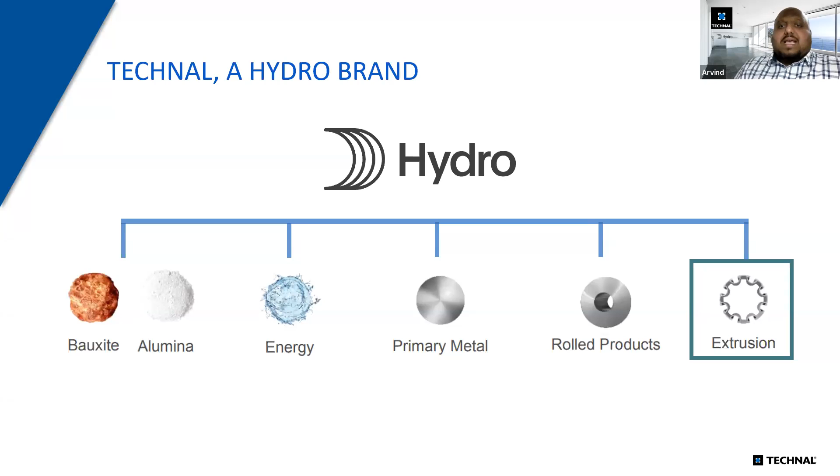So we have 5 business units, and as Technal, we come under the extrusion business unit. In the extrusion business unit, apart from having more than 100 locations of extrusion facilities globally, we also have precision tubing, which is indirect aluminum production used in radiators, refrigerators, industrial applications, and of course in building systems as well.

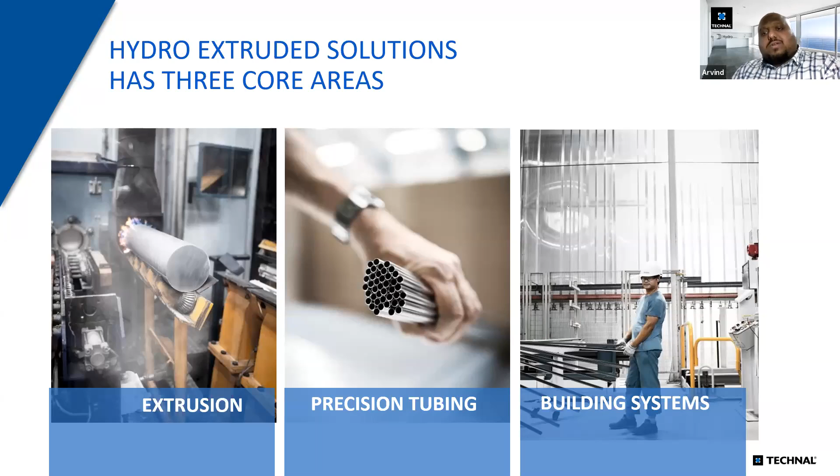So you would find Hydro products in brands like Tesla, in Coca-Cola cans. Our brands and products are used in a very wide range of multiple brands. Now, coming to the architectural business, the building systems, we have with us 4 brands under Hydro Building Systems. We have Wicona, a German brand with more than 70 years of experience. We have Technal, a French brand with more than 60 years of experience.

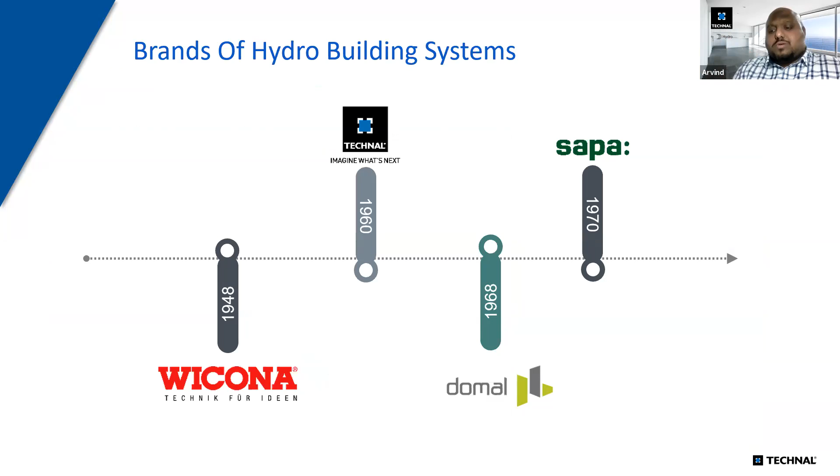Domal, an Italian brand, and Sapa, a Scandinavian brand. All of this put together, we have a wide variety of products and solutions which we offer for the windows, doors, and facade business.

The Technal brand is the most popular brand in the Middle East because it's been here for more than 40 years, with rich experience dealing with local conditions and environment. As a brand, Technal hails from France, from the southern city of Toulouse, which is also very famous for the Airbus, manufactured in the same place where Technal originates from.

Technal as a brand is in more than 70 countries, with 60 years of experience. Architects really like to work with Technal because we tend to work with them very closely in helping them design and achieve their design intent for their wonderful architectural pieces.

In terms of product solutions, we have sliding systems, windows, doors, facades, and we also have fire-rated windows, doors, and facade. We have bullet and burglar-resistant products, handrails, pergolas, and conservatories. You will start seeing these products in various formats along this week as we showcase different technologies and new trends.

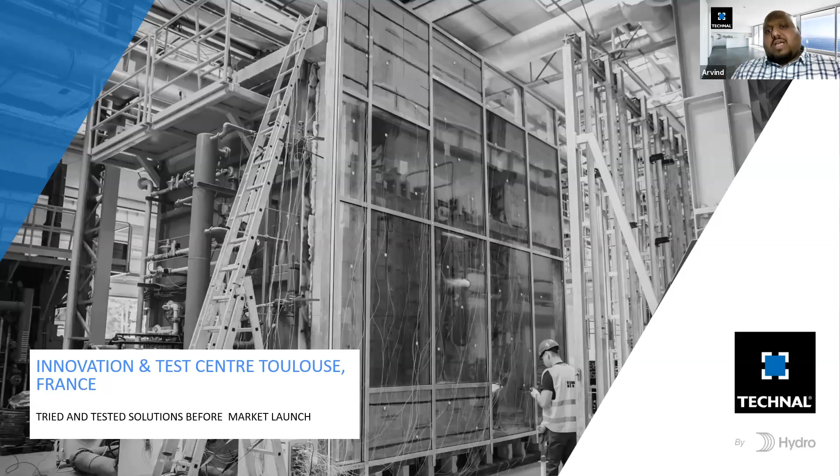What's very significant about Technal is that all our products are tried and tested at our Innovation and Test Center in Toulouse for 3 years. Even before a product comes to the market, we're doing a lot of testing and market prototyping before it's finally launched, which gives you peace of mind because all these products are tried and tested.

We also have in the lab a wonderful facility for acoustics, seismic studies, structural studies, and joinery enhancements. We also have a dedicated team studying net zero and doing research and development around net zero buildings. So if you, as an architect or designer, would like to explore further research and development, please feel free to talk to us.

We'd be more than happy to collaborate with you, encourage and work with you, and support you in your R&D for your projects. In a nutshell, Technal has been here for 40 years in the Middle East.

We serve over 10 countries, with more than 150 authorized installers across the GCC. We have accomplished more than 2,500 projects. We have a 95-member team in the Middle East, probably the largest for a building facade system company, and 3 warehouses with more than 60,000 square feet of space.

Our headquarters for the whole operation is in Bahrain, in Manama, and that's a nice photo of our office complex. We have a couple of warehouses in Bahrain, in Dubai, and in Oman as well.

You see some photos of our office and our showroom. If you ever pass by Bahrain or Dubai, please let us know — we would love to host you in our showroom. And that's our wonderful team here in Dubai, all looking forward and excited to welcome you whenever you pass by this side.

So what do we do in the region? Apart from Technal being a global leader and a local leader in profiles and accessories, we also do a lot of other stuff: training, testing, project services, software, consulting, optimization of products, testing, and certification. So we have a whole range of solutions which we offer to this region.

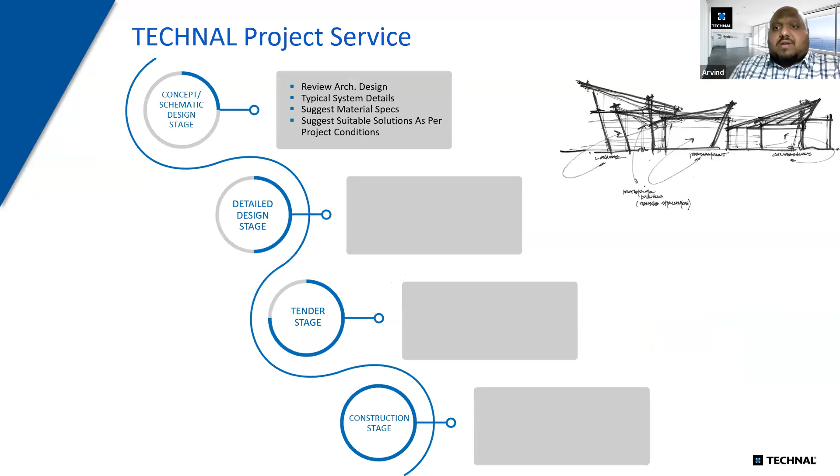In terms of project service, we work with architects right from the concept stage, supporting them in achieving their goals. As the project moves to the detailed design stage, we give further inputs and clearer details with interfaces so the architect can develop strong IFC drawings, so the contractor doesn't take things for granted and works with high quality solutions and good recommended finishes as per the design intent.

Once the project moves to the tender stage, this is where we have a term we keep hearing — value engineering. This is where we also work with the architects, helping them understand ways and methodologies to better the proposal and hopefully achieve the desired cost targets for the project.

Last but not least, once the project is under construction, we have a dedicated team of site engineers who visit you and help your resident engineers ensure that the products designed in the concept and detail stages are used completely in the right fashion at the particular project site.

And this is where we also help architects to ensure, and we ask them also to make sure that Technal reviews and stamps the shop drawings so there's no mistake and error which could happen at the project level.

So in terms of projects which Technal has done, we work across all kinds of verticals, all kinds of formats of projects, from education to villas to tourism-related hotel projects, health and well-being, offices and shop fronts, private and residential. So it may be a small project to a super tall, super structure, high-rise building. We work across all formats.

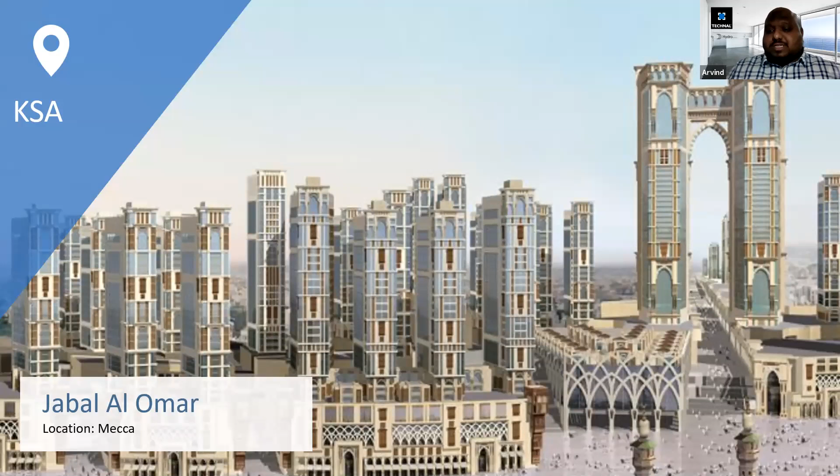Right, so that is a quick introduction of what Technal does and how Technal is positioned in the region. And now it gives me the opportunity to segue into the main topic which we have come here today for. So we want to talk about what are the key functional parameters which one should take into consideration while choosing the window, door, and facade.

Now, in the Middle East, we are known to adopt the latest technologies. A great example is mobile phones. Ever since the 80s, whatever mobile phone was launched, Middle Eastern people, including all the expats living here, were the first to upgrade to the technology. In fact, there was a report which says we have 99% social media penetration, meaning we have the latest devices with our phones. And as a new phone launches, I think the first market to adopt it is the Middle East.

But unfortunately, when it comes to specifications for facades, right from the 80s till now, we always follow the same principle: that the facade or aluminum window and door must have profiles with 3 mm wall thickness. And this has not changed ever since the 80s till now. Many of the projects, many of the consultants still believe that a thick profile or a thick frame means a strong frame. Hopefully the objective of today's session is to break this myth and give you better parameters to look forward to while choosing the facade, and not just the wall thickness.

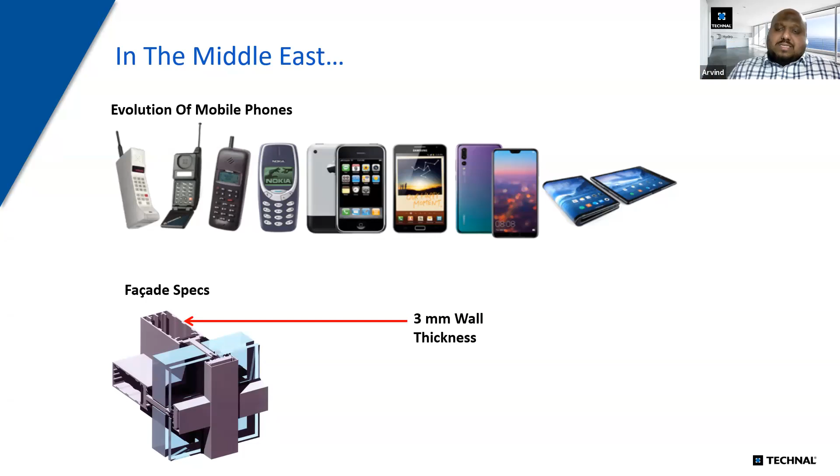So what does a facade skin do? What are the real objectives of the facade? First, of course, you want to design the facade in a way to reduce all the negative external factors. You have heat, noise, damp, storms, rain, cold, sun. So you have all these negative factors which you want to protect your facade from.

On the contrary, you also want to use the facade to maximize some of the energy available around you. You want to let in natural light inside your building as much as possible. You want to let in ventilation, and especially during this COVID pandemic time, it's proven that the more ventilation you have in your building, the more you're able to clean and cleanse the building with fresh air and negate all the unclean energy, unclean air you have thanks to air conditioning and so on. And we also want to use the facade positively with the sun that is available, in a very positive way.

Your facade is the first thing you see on a building. The first impression is the best impression, so whatever your facade is designed, this is the first thing people see. You always want to create a striking impression from the first view of the building itself, which is why the facade skin is quite important.

So what are the real parameters you should look for? I've shortlisted 10 of the most important critical factors we look forward to.

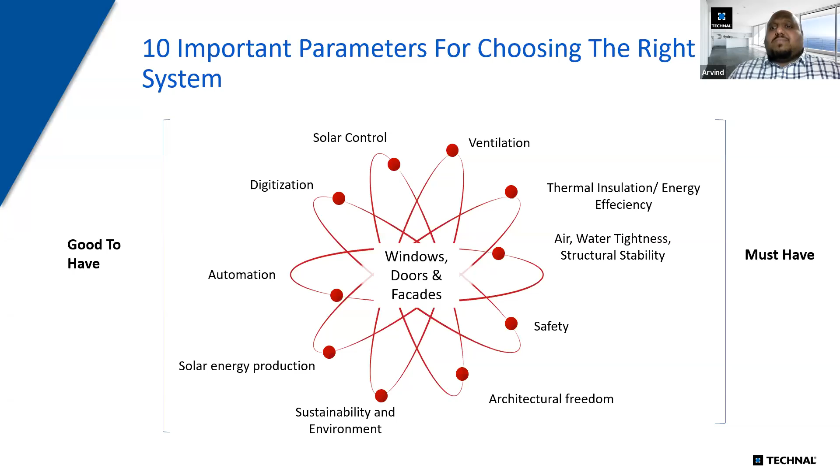So you have 10 interesting parameters as a base consideration for choosing the right facade system. I've classified the ones on the left as good to have - good technologies worth considering. But on the right, factors like ventilation, thermal insulation, air tightness, water tightness, structural stability, safety, and architectural freedom are must-have and non-compromisable. These are parameters you should always consider while choosing your facade system.

In the Middle Eastern context, the most important baseline parameters we should consider are wind loads, water tightness, air permeability, thermal insulation, acoustic insulation, and fire and life safety. I'm happy to say the new Saudi Building Codes of 2018 are fantastic, as they've given very detailed and broad guidance on some of these topics, which I'll showcase throughout my presentation along with its relevance to the new Saudi Building Code.

So today, as architects and designers, not only do you have these important factors, but you also have baseline government guidance that helps ensure your specifications are broader and tighter in the context of the performance of the facade skin.

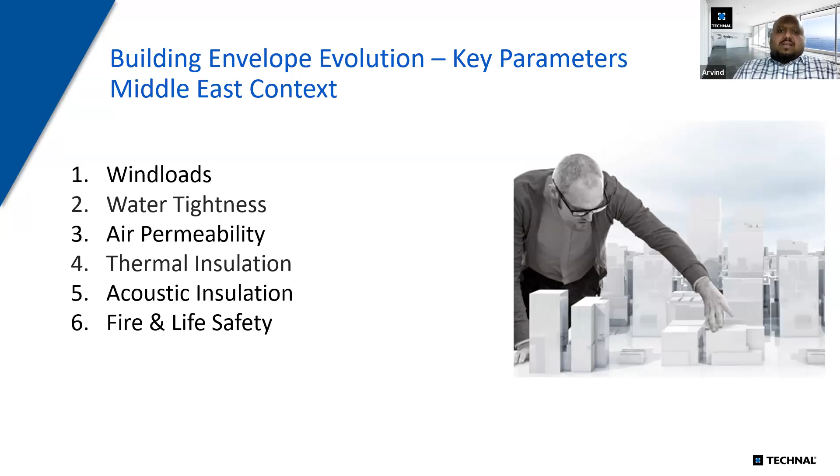Let's talk about wind loads. The wind loads essentially relate to the structural integrity of the whole facade, window and door. The facade and fenestration product you choose must be considered for the wind loads the building will experience in that particular area. Just having a wall thickness of 3mm does not mean it's suitable to adapt to winds or the different wind factors that impact your building.

So how do you address that? There are some considerations we make. Firstly, when a building is designed, it has what we call a wind tunnel report, which gives a facade cladding pressure study indicating the kind of wind pressure the building is exposed to. This also factors in the buildings around it - a building surrounded by high-rise buildings could experience very different wind pressure due to vortex effects if located in such an area.

Local building codes also help determine what wind pressure should be considered for a particular building. In the Middle East, we usually use the American code, ASCE 07, as a guideline in the absence of such wind tunnel studies and cladding pressure data.

Now I'm showing you a nice, interesting video. In 2019, there was a small, low-rise building in Odisha, in the eastern cities of India, and we experienced a cyclone called Cyclone Fani. So watch how this cyclone passing through the building really impacts the whole facade and the windows and doors in this particular building.

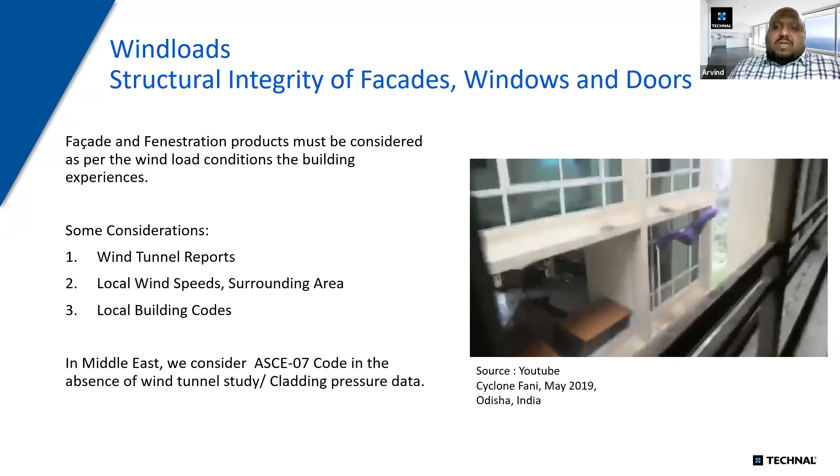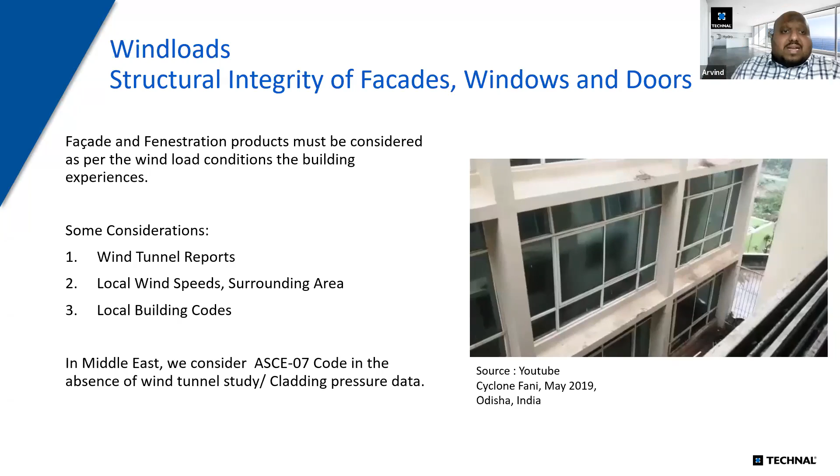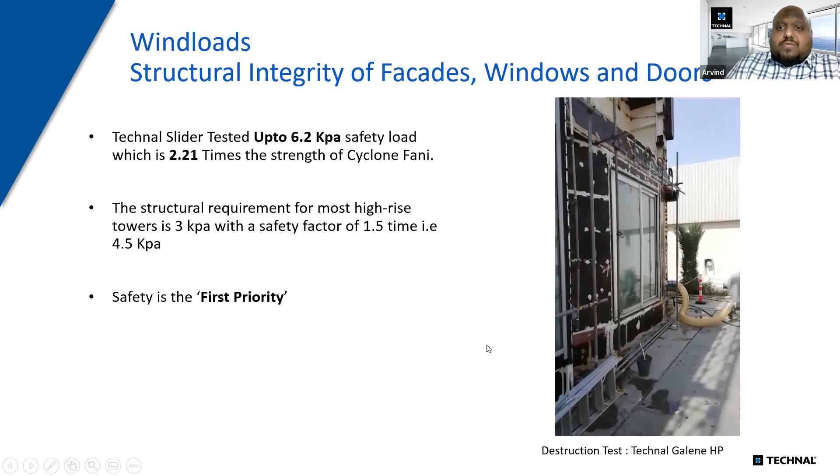So how do we design products to tackle such wind pressure? At Technal, we test our doors, windows, and facades for what is called destruction wind pressure. Here, for example, this sliding door is being tested for a destruction wind pressure of 6.2 kPa, which is 2.21 times the strength of Cyclone Fani which you just witnessed.

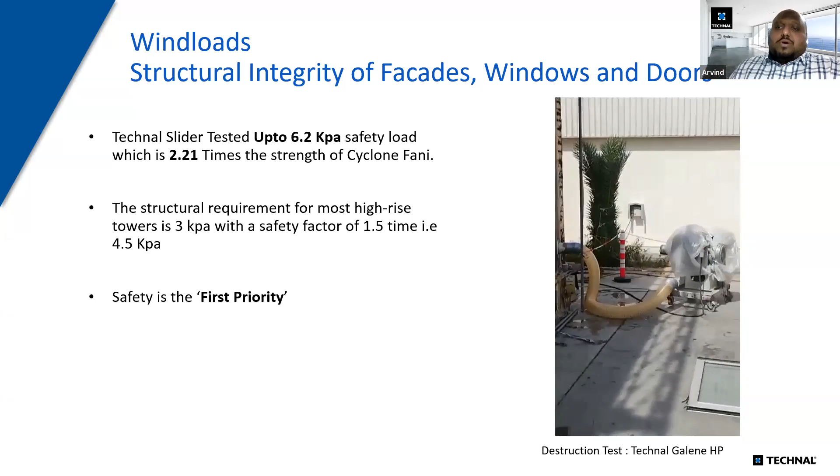My colleague is now shouting out the wind pressure. It's at 5.3 kPa — you can see how the window is bulging with all the wind hitting it. Now it's 5.5 kPa, now 5.8 kPa inside this chamber. Now 6.2 kPa, and at this point it completely reaches maximum and the window is thrown and fallen. So the door which Technal manufactures is tested for up to 6.2 kPa of safety load, which is 2 times Cyclone Fani.

What's also important is understanding that the anchorages, the quality of fabrication, and the choice of system are all very important for such high wind pressure requirements. For most high-rise buildings, the wind pressure commonly noticed is about 3 kPa, meaning a safety load of 1.5 times is recommended as per the code. So 4.5 kPa is generally the wind pressure you need to test your product for destruction.

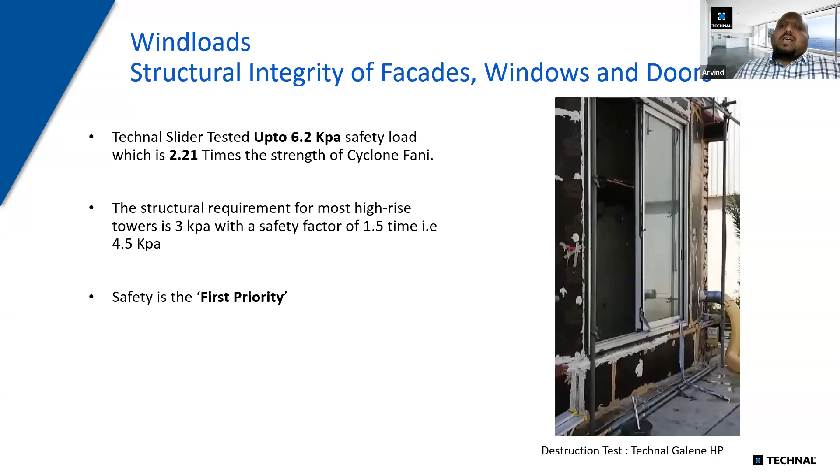This is one of the very important criteria when choosing the facade system. Linking this to the Saudi Building Code, I'm really excited that it talks in detail about the wind speeds in different zones of Saudi Arabia. The central provinces of KSA experience almost 52 meter per second 3-second gust speeds, while on the coast it's about 42 to 44. So the wind speed differs from zone to zone, meaning we cannot say one product fits all territories.

So it's very important — for example, if you're developing something along the Red Sea, the basic wind speed considered there is about 46 meter per second, equivalent to 165 km/h. So you have to define product selection based on the zone. I'm really proud that the Saudi Building Code addresses these wind speeds across different pockets of Saudi Arabia. This is something to look forward to — the wind speed and structural loads your facade experiences.

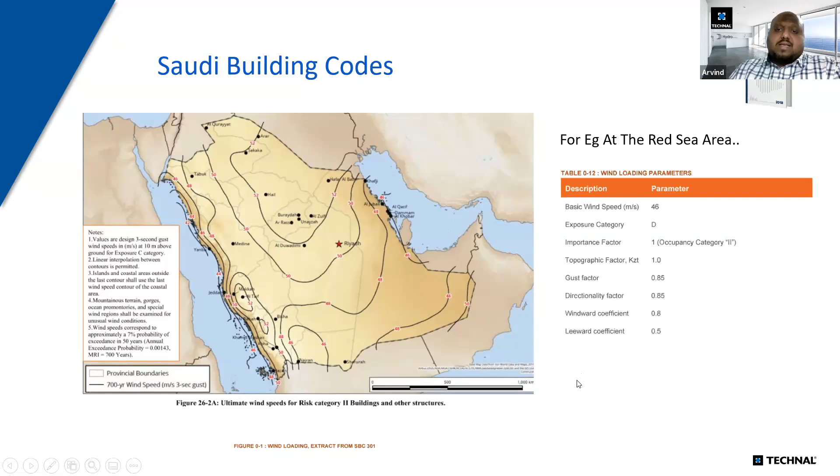The second factor to look at is water tightness, because this helps weatherproof your buildings. There are various standards available today for testing, such as the EN standard or the ASTM standard. The water tightness requirement could range anywhere between 300 to 600 Pascal, depending upon the building requirements.

The CWCT guidelines state that a minimum of 20% of the design wind pressure should be considered as minimum water tightness. For example, if your building experiences 3 kPa of wind pressure, 20% of that, which is 600 Pascal, should be the minimum water tightness of the facade, window, or door you're putting on that building.

Now, if the design wind pressure is above 2.4 kPa, the code says you should have a minimum of 25%. So the code also pushes the barrier a little bit higher when you have wind pressures above that particular threshold.

Now, for water tightness, how do you test it? On the right-hand side, you see an image of a video of how we test our products. We test for static and dynamic conditions, and right now we're showing how we test our facade in dynamic condition. The rule is that when applying this wind and water, there should be no water visible on the inside. I'll show you both videos.

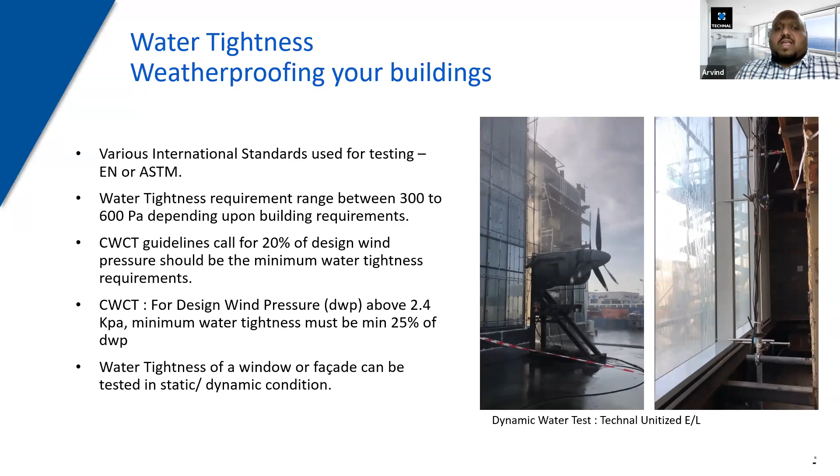First, on the left-hand side, you'll notice how a real Bombardier engine is used to measure the dynamic water tightness. As the propeller starts, water is sprayed along racks of water spray, simulating a rain effect. On the right-hand side, we're checking from inside if there's any kind of water leakage or presence visible. If there is water inside, that means your system is failing. By doing these tests, we are simulating a real life rain condition to test and challenge your facade.

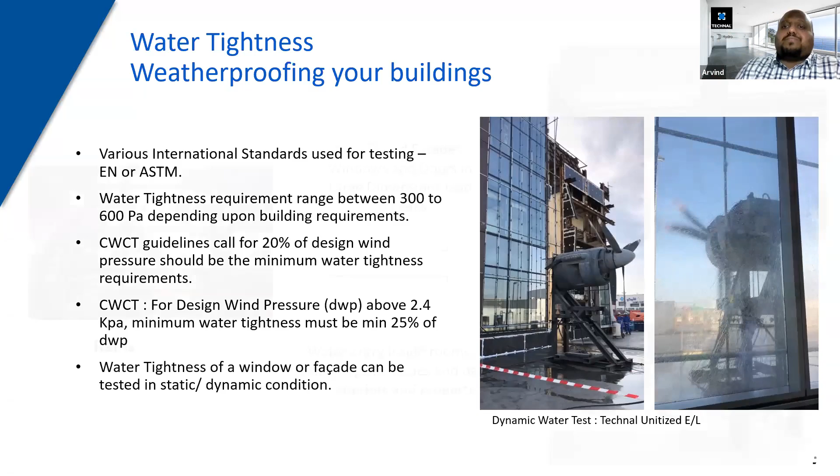And that's a very important factor to consider when you design your building and choose the right facade, windows and doors. So what happens if you have a leaky window?

This is a very famous picture floating on the internet, where the resident has to use all their clothes to stop water from entering inside during a rainy day. There are several pockets of Saudi Arabia exposed to a lot of rain, and it is important that we are protecting our windows.

The factor and criteria which we look for is to have a tested window for static and dynamic conditions, with static water tightness at least as a bare minimum.

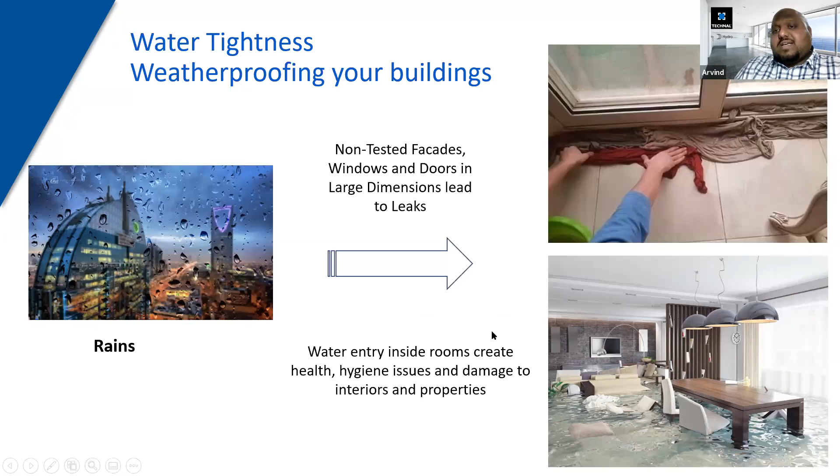The picture below is a bit of an exaggeration, but what we mean is that we spend millions, and sometimes excessive amounts of money, on the interiors of our buildings, because we look at that space as really a space to live, to invite people in. But imagine if you have a leaky window - you're exposing all that wonderful furniture and all those elements you've purchased to terrible risk if water starts to leak in. So please do consider this criteria, water tightness, as a very important one.

Air tightness requirements usually range between 150 to 300 Pascal, with different leakage rates prescribed for different kinds of product formats. So a sliding door versus a hinge door versus a fixed curtain wall all have different types of leakage rates, but the pressure always varies either from 75, 150 up to 300 Pascal.

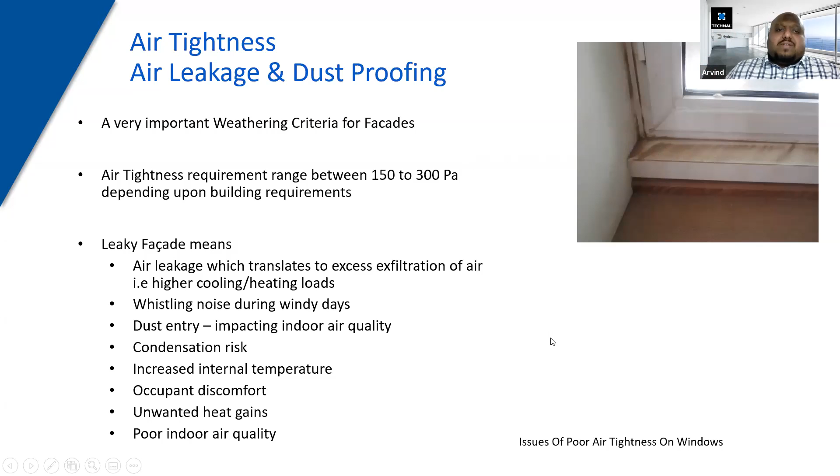What happens when you have a leaky facade? Air leakage means excess exfiltration of air, meaning more hot air comes inside, pushing you to use more and more air conditioning. Sometimes during windy days, you start hearing whistling noise.

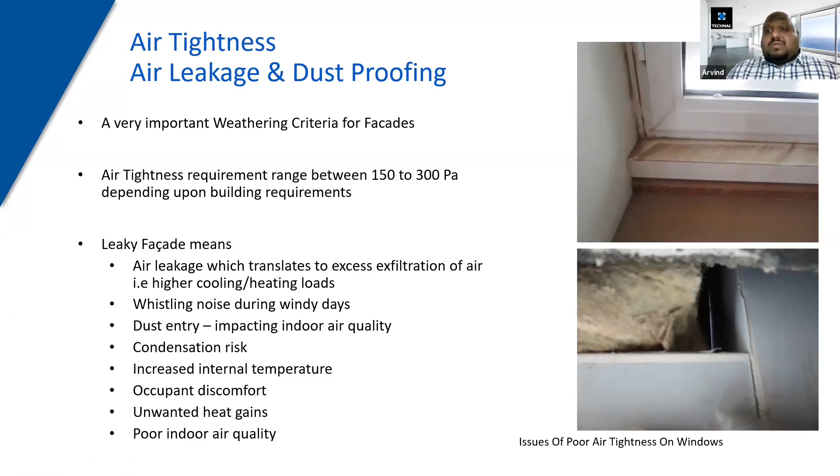The dust entry inside really impacts indoor air quality. There's a high chance of condensation risk because you have extreme heat outside and excessive AC inside, so there's a huge potential for humidity, and therefore condensation risk. You also definitely get increased internal temperature, which again boils down to using more and more air conditioning.

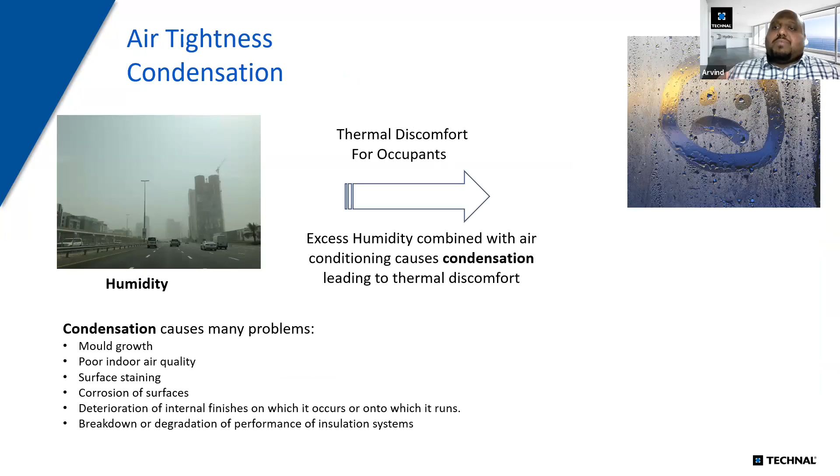So what happens when this humidity occurs? After a period of time, you start seeing condensation appearing on the inside of your windows, doors and facade. When you have excess condensation, you have many issues - a huge potential for mold growth.

There's poor indoor air quality, which I'll explain in the coming slide. The surface starts to stain, your surfaces start to corrode, as you see in this image below. Your internal finishes start to deteriorate, and all your insulation systems inside your building start to break down.

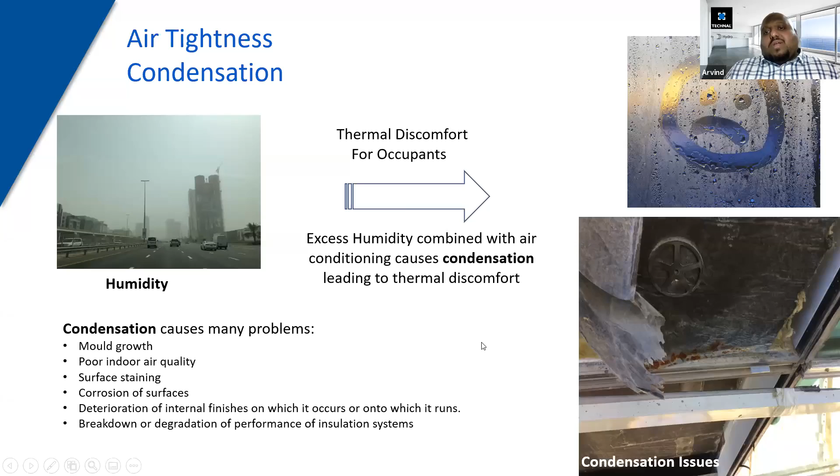Whenever you have dry walls, for example in hotels and hospitals, we use a lot of dry walls. When these dry walls are exposed to condensation, thanks to this humidity, molds start to form. These are invisible killers which we don't see, and it really impacts the indoor air quality and therefore affects our health completely.

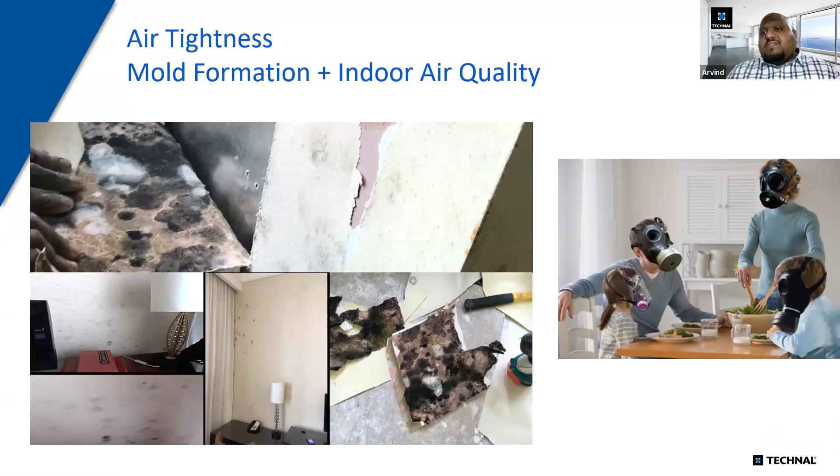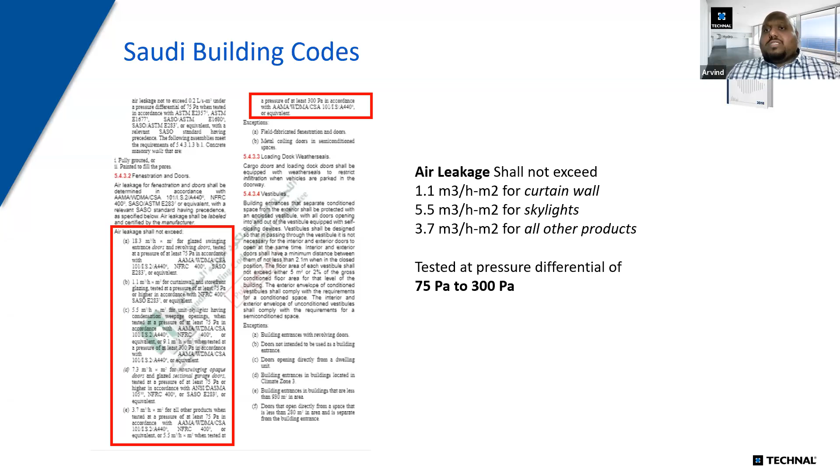Once again, the Saudi Building Code comes here and really defines in the new code very distinctly the air leakage rates. They've specified that for curtain walls, what should be the air leakage rates, for skylights, what should be the air leakage rates, and for all other products what should be the acceptable air leakage rates. They've also mentioned at what pressures they have to be tested. So once again, the Saudi Building Code really pushes the bar up and starts to make note of these problems which have happened before, and is now getting widely used in the industry for all the new upcoming projects.

The fourth criteria I would like to talk about is thermal insulation. Now, thermal insulation is again connected to the facade system or the window and door system. The old market was all about having curvy design, dealing with heavy amounts of fabrication, thick sections - the 3 mm wall thicknesses, sturdy, big, bulky profiles. That was really what the old market trends were.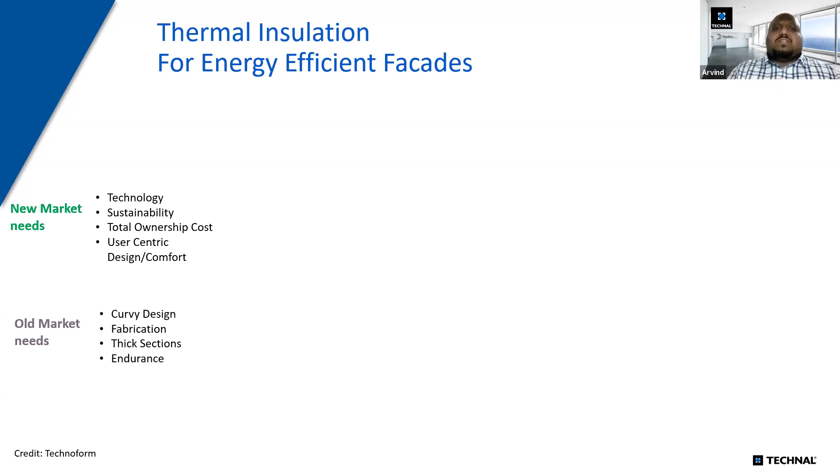But the new market trends, the new language which architects speak, are technology. Architects and designers want to know about sustainability. Architects are today talking about the total ownership cost - not the initial investment, but if I upgrade to this technology, what is going to be my payback time? Most importantly, they're talking about user-centric design and comfort. All of this is related to the energy efficiency of the building facade.

Now, we did a survey and found that in the city of Paris, the city is so densely populated that the microclimate of the city is constantly evolving. We've shown two graphs, and the blue line depicts the microclimate in the city of Paris when all the air conditionings are switched on. When air conditioning is switched on, a lot of heat is dissipated into the air, and therefore the temperature is at a very high level within that densely populated city. We found that when the AC was switched off for just one day, the microclimate along the city dropped by 1 degree Celsius.

That's a tremendous impact on the microclimate of your buildings and your cities. So this is a very important factor - when we use more and more air conditioning, it means we are constantly increasing the microclimate of our cities. And when this reaches a certain level, it is creating harmful impact to the environment.

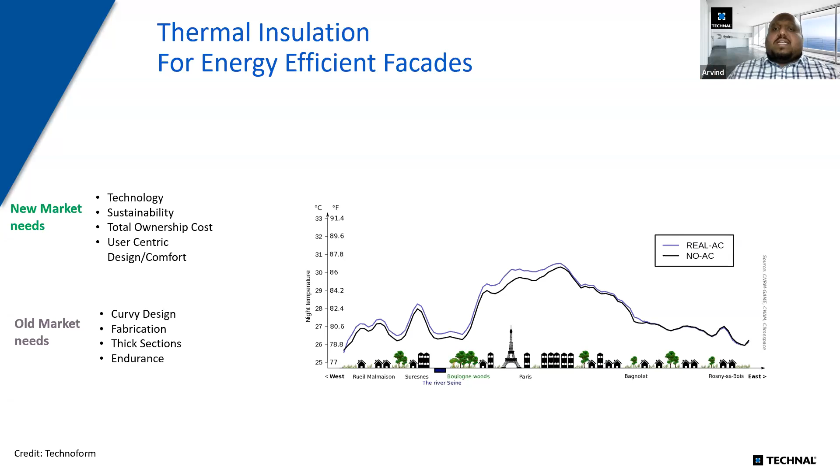So the old vision for a window, door, and curtain wall in our region especially was all about having these cold systems, which are non-thermally broken systems - bulky, thick, and all about robustness, which is what people cared about. But today, with the advancement in technology and evolution of design, we now have a qualitative jump to what we call thermally broken systems. This is a very important leap because, as I explained in the earlier slide, by having energy efficient systems with less impact on the cooling loads, you are really promoting and conserving the microclimate of densely populated cities.

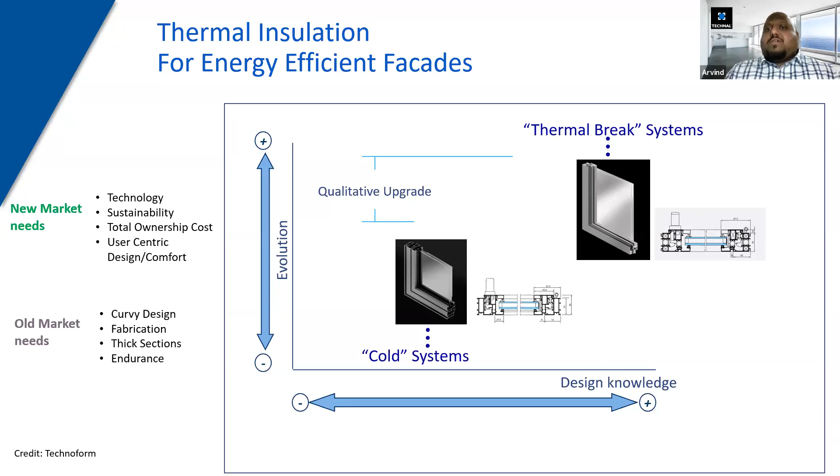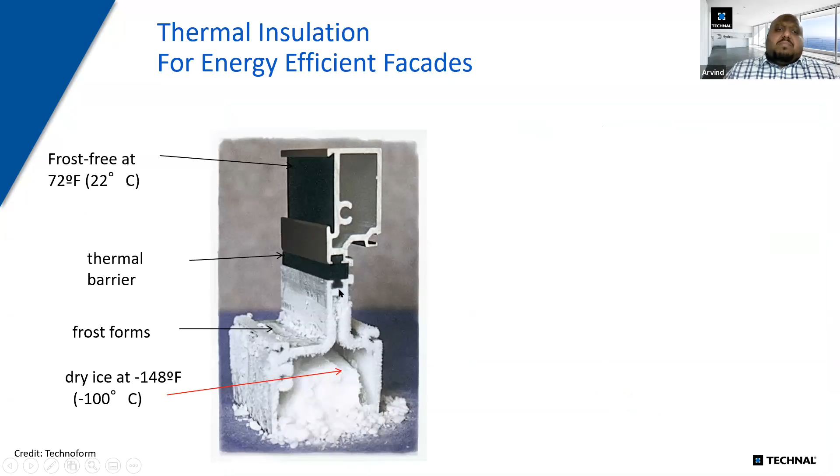So what we are using in our current thermally broken systems in Technal is what we call a thermal barrier. This is a lovely image which depicts the benefit of thermal break. You have the profile, where two child profiles are crimped together with this material called polyamide, and this acts as a thermal break between the two profiles. As you see here, when keeping this in an environment of minus 100 degrees Celsius, your internal frame does not get all that impact, as you see clearly from this image, simply because the conductivity of the polyamide is far lesser than the conductivity of aluminum. So we are able to break the heat flow.

So in cold countries like Europe, the product's only duty, or the facade's only responsibility, is to keep the cold away from the outside so that the heating loads inside the building are less. But in our Middle East context, it's quite the opposite. We want the heat to stay away so that our consumption of AC is lower and lower. So really our role is to ensure that we have a quality amount of energy saving in air conditioning.

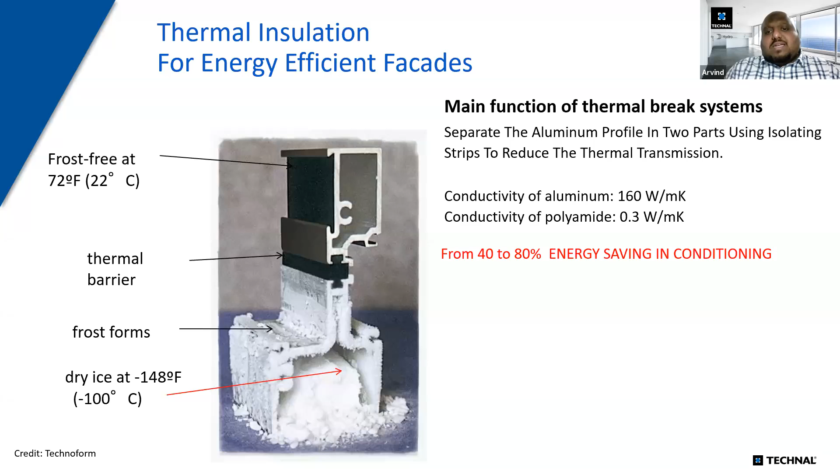So with the use of the Technal thermally broken systems, we have simulated and done several studies to prove that 40 to 80% of energy saving is possible by using thermally broken Technal systems.

This also has a very positive environmental impact because these polyamide profiles are 100% recyclable, they're reusable, and they reduce CO2 emissions, because the more air conditioning you use, the more you're stressing electricity. In the Middle East, not only do we have CO2 emissions, but all the energy comes from oil, so we are literally burning oil to produce energy. This energy is sold at subsidized rates to many projects so people can enjoy an unlimited supply of energy, but each time we consume more air conditioning, we put more stress on our oil industry because you're burning oil to achieve this energy.

By using thermally broken systems, you're reducing condensation through windows, as we saw on the earlier slides. The benefit of having less condensation is really needed for better comfort for people inside.

If you're designing buildings with LEED rating, for example, use of this kind of thermally efficient facade system helps you gain more points. One very important benefit of using thermally broken systems from Technal is that you also get higher acoustic insulation, which I think is very important and I'll cover in my next slide as well.

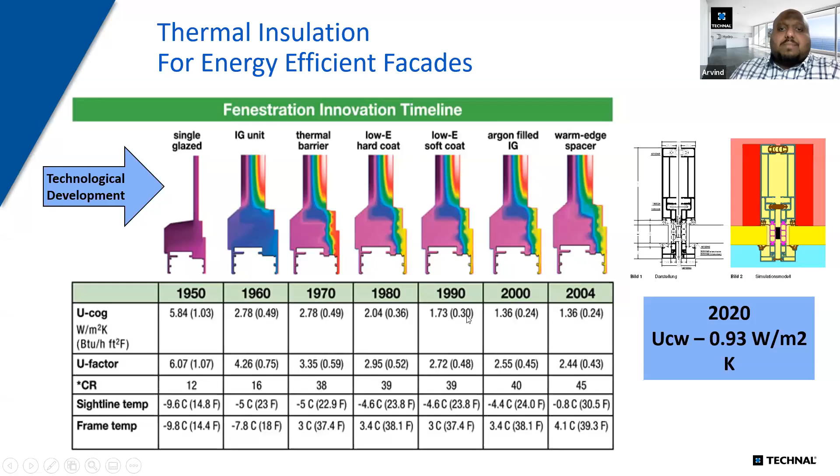The Saudi building codes already address two factors: the window wall ratio, and second, they clearly specify the assembly U value. So as an architect, you should now look not only at the value of the glass, but also at the assembly U value, meaning the frame and glass put together.

Now comes the next important framework to consider, which is acoustic insulation. What is acoustic? This is a topic which many people have a lot of confusion on, especially when it comes to defining what the real acoustic requirement should be for your building.

Generally, acoustic values are prescribed by a specialist. There are acoustic consultants who review the location of the building, like where the building is located, next to the airport, next to a metro station, next to the sea, or in a highly construction-prone area.

All these factors are studied by an acoustic specialist, who then prescribes that the building should have so and so acoustic values. So how do you read acoustic values? The factor we follow is RW, which is basically weighted reduction of sound. This really talks about the acoustic quality of a window. So if somebody says my window has a performance of 40 dB RW versus a window which is 35 dB RW, the 40 dB RW has better performance from an acoustic point of view.

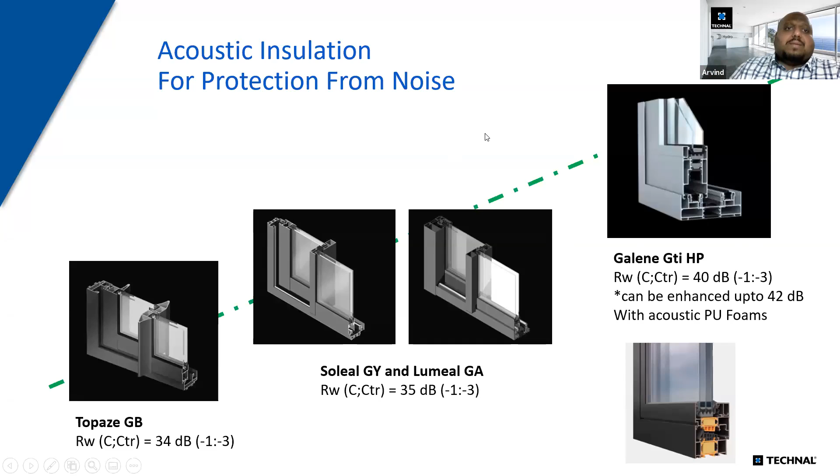The last important item is perimeter fire protection. When you have a facade, you always have a zone called the zone of no accountability—this is the area of the facade on the curtain wall where there's your slab, and there's a potential risk of fire jumping from floor to floor.

The UAE Fire and Life Safety code has a very well-defined standard, and it prescribes that a facade system be tested as an assembly for BS EN 1364 Part 4, the go-to reference standard for perimeter fire protection. We've done a lot of collaborative study with Siderise, promoting the knowledge of this topic among stakeholders in the region through tests prescribed by civil defense. We've achieved more than 3 hours of integrity and insulation fire protection across the spandrel edges.

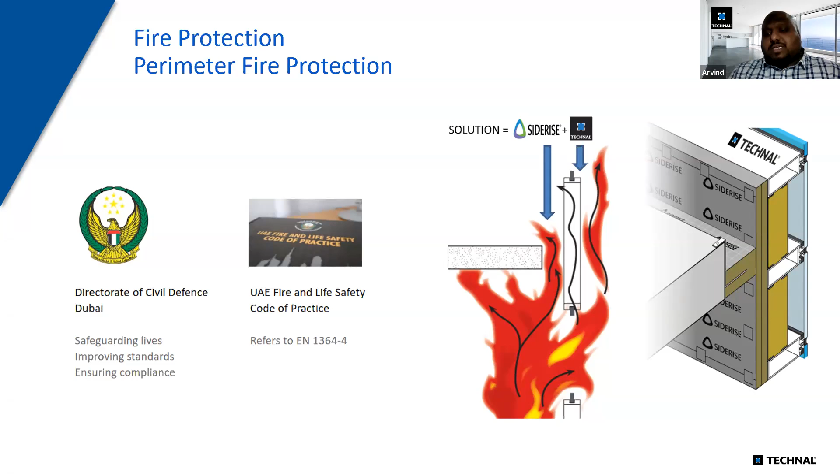We will talk more about fire on the day when we take the fire and life safety course, but this is an important component which I thought I should bring up when you are choosing the right facade system. Of course, there are other parameters.

You also talk about blast proof, bulletproof, burglar resistance, sustainability, user-centric design. These are good to have parameters to have with you for sure. But definitely stay tuned for these courses, because we're going to be talking more about them in the coming days.

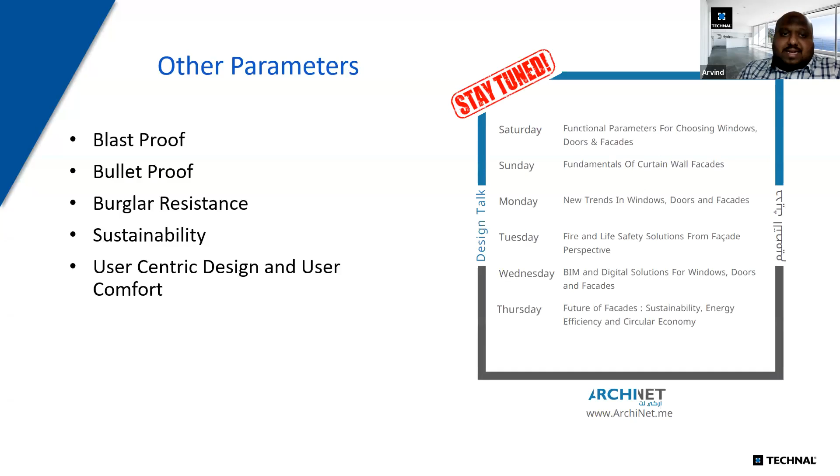Along this week in the Facade Design Week with ArchiNet. So I would like to conclude and bring you back into perspective. What are the things we discussed today? Number one, remember the evolution of the mobile phone.

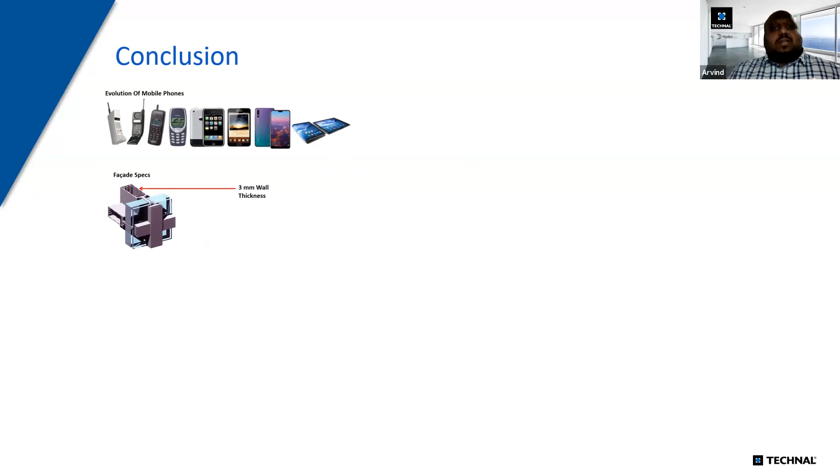The mobile phones have evolved. We have curved screen phones now. We have dual screen phones today. The specification and the technology surrounding windows and doors have also evolved.

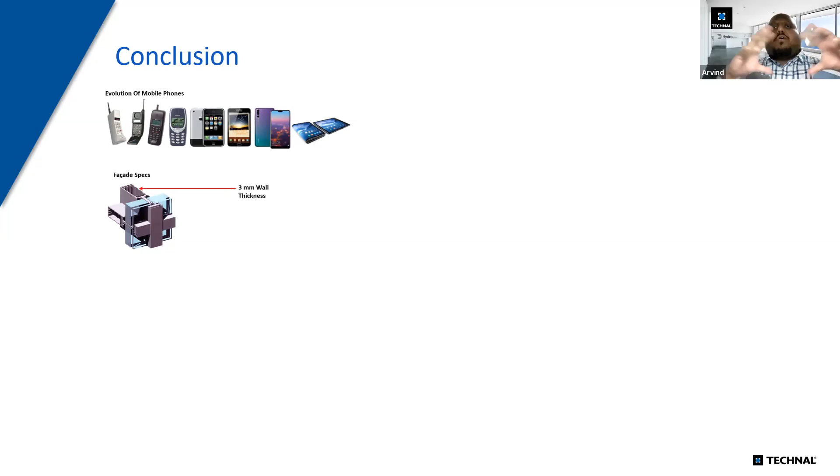So please ignore the 3 mm wall thickness. Today we talked about several factors, from air tightness, water tightness, structural stability, thermal performance, acoustic performance, fire performance. So you have all these factors to consider before choosing the facade, not just the wall thickness of the profile. And these are other parameters.

In addition to these, we talked about the good-to-have ones like solar control, digitalization, automation, solar energy production, sustainability, and environment. These are good parameters to have too. So stay tuned for the next few days where we're going to talk about these good-to-have parameters as well.

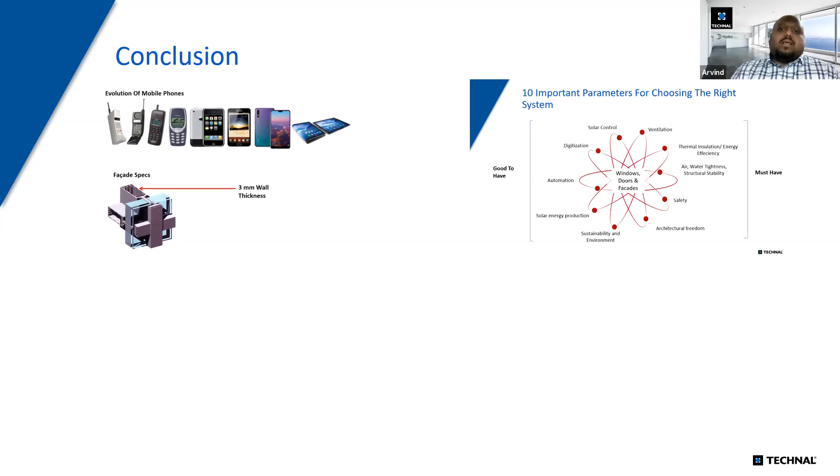Most important, we have a fantastic new Saudi building code, and I think this code will be truly successful if we as an industry start to implement it. I thank ArchiNet for giving us this opportunity, because we would like all the architects to start prescribing and revisiting the specification documents, aligning them to the new Saudi building code, because this is when we can really elevate the quality of construction in our region and in our markets.

And last but not least, don't forget thermal insulation. We talked about how important this is, especially in cities, in urbanized environments in Saudi, where buildings are getting rapidly developed. Please think about the microclimate around these cities. We as architects, consultants, and designers have a huge responsibility to upgrade the technology for our facade windows, doors, and facade systems.

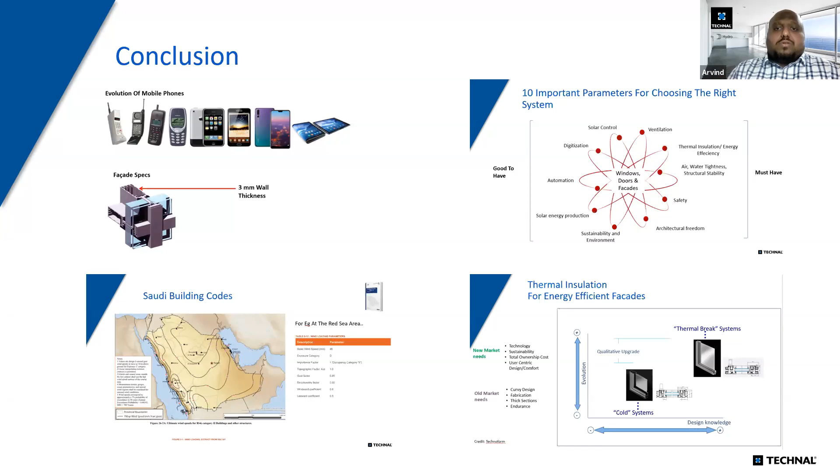So that brings us to a wrap for today's session. I hope you enjoyed our conversation. And at this time, I would like to bring back Mohammed, and hopefully, if there are any questions, we can take those up as well.

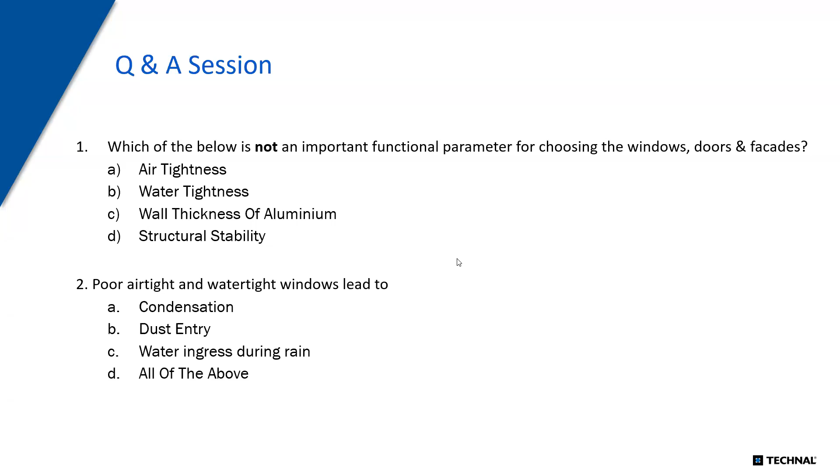Well done. Third question: today you can have facade thermal performance up to 3 watts per meter square Kelvin, 2.1, 1.9, or up to 0.93 or better. The right answer is up to 0.93 or better, and again 70% of you got that correct.

Fantastic, kudos. The fourth question: in terms of facade acoustics, more the RW, better the acoustic performance. This is true, and 79% got this correct.

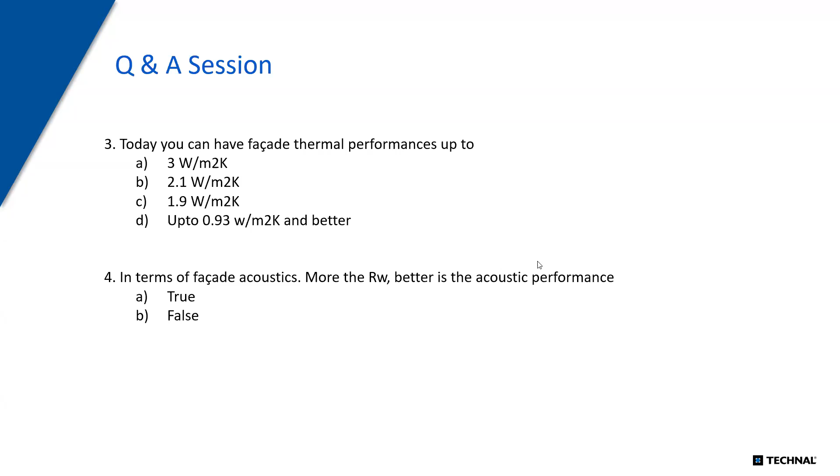So fantastic. And the last question, this is a very big question for me: Technal brand is originally from France is the correct answer. So 72% got that correct.

So for those who said Germany, yes, we have a German brand called Wicona under Hydro. UAE, yes, we have an office in UAE. KSA, yes, we have presence in KSA, but the right answer is the brand is originally from France.

So majority of you have got the right answer. That clearly shows the quality of the audience. You've been a fantastic audience. Thank you so much for being with us and listening patiently to our session.

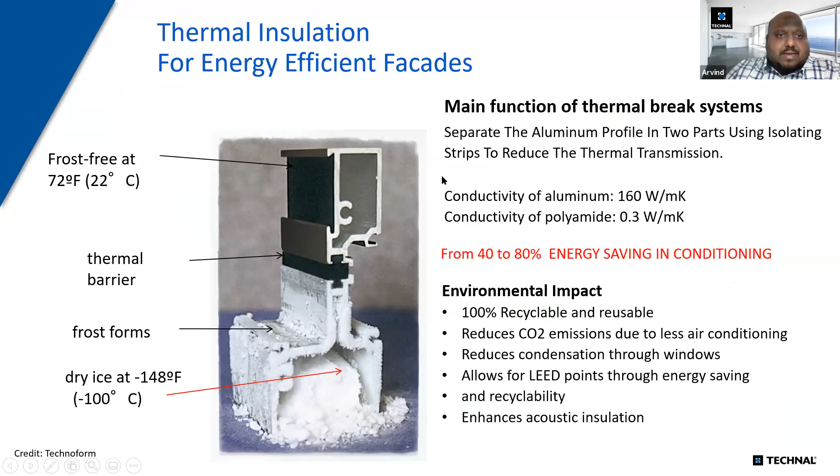Second question, just a second, because we had plenty of other questions here. Okay, this is a question from Abrar: why is having air tightness different from having water tightness? Wouldn't the physical barriers that prevent air logically prevent water?

Brilliant question. So what happens when there is water hitting your window or door facade? The water actually goes through your frame and the water needs to come out. So there is something we call pressure equalization which happens, and that needs to be defined in the system design and detailing. Whilst air infiltration talks about allowing air from outside inside, water has a different behavior altogether when it hits the facade. So your water tightness is all about evacuating water in a calculated format to the outside so that water doesn't come inside, so water should not gush inside.